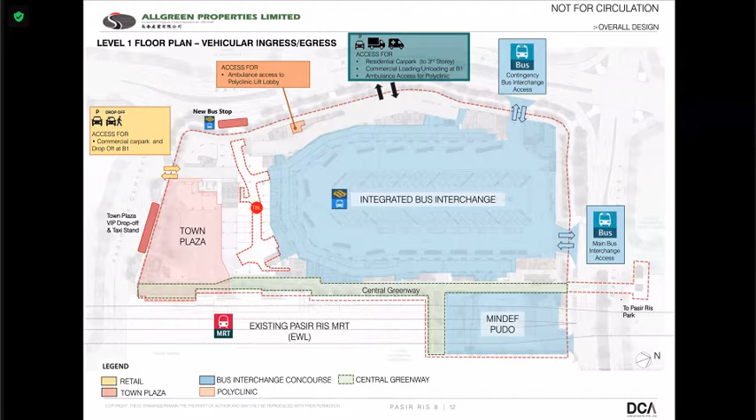In terms of commuters and pedestrians, the entire development is very porous, with many points of entry. Being located in the town center, the development is designed with a covered linkway surrounding all sides, connecting to the town plaza, sheltered, and through the block link as well. There's no shortage of entry points into the development, be it from the MRT, the Cross Island Line, the block link, or the bus interchange itself, which has 6 ingress and egress points by foot.

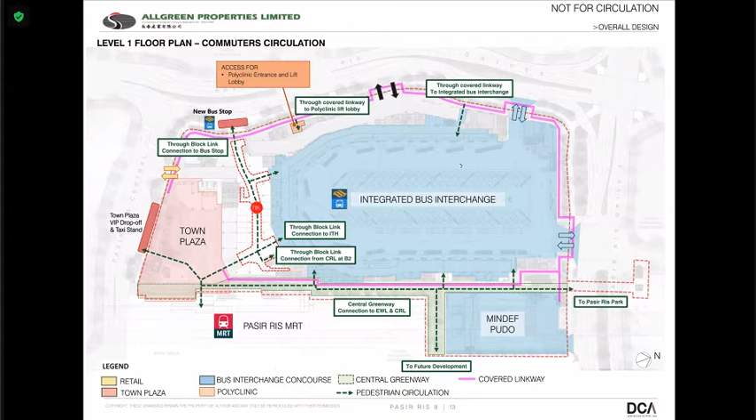For cycling, the development has a walking and cycling path surrounding all 4 sides. To bring cyclists through and into the development, we have no shortage of lifts, sizable enough for the cyclist with his bike to enter.

Likewise, there are 2 sets of lift and staircase provided to reach the residential E-deck and level 3 at these 2 locations.

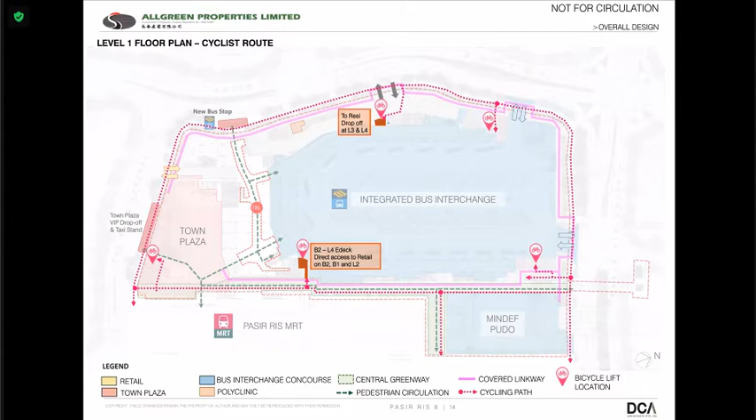The development has about 1,200 bicycle parking lots, located together with end-of-trip facilities at basement 1. This provides convenience for cyclists to bathe, change, go to work, take the MRT, or simply enjoy a cup of coffee at the nearby cafeterias of the development at basement 1.

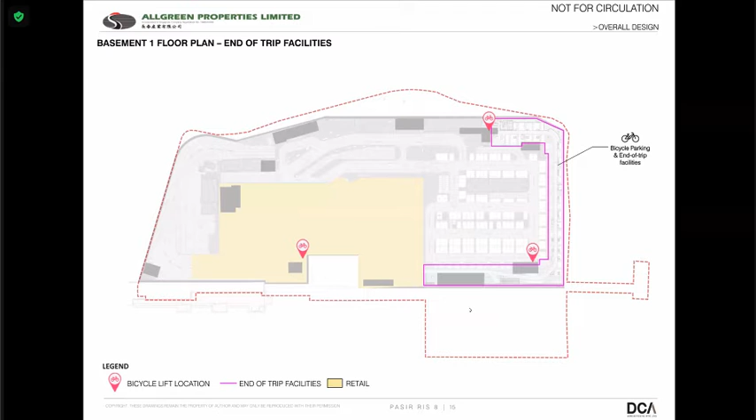For residents surrounding the covered linkway of the development, they can enter and walk sheltered through the covered linkway surrounding the development to go home to their respective blocks.

These are the locations of the respective lift lobbies. As mentioned, there are 2 dedicated locations. The major one, located 50 meters from the MRT exit, is a pair of resi lifts that bring visitors and residents up to level 3 and level 4 E-deck of the residential components. Whereas at Drive 8, near the vehicular entrance for the resi components, we have a resi drop-off lobby that brings residents and visitors up to the arrival lounge at level 3 of the resi development.

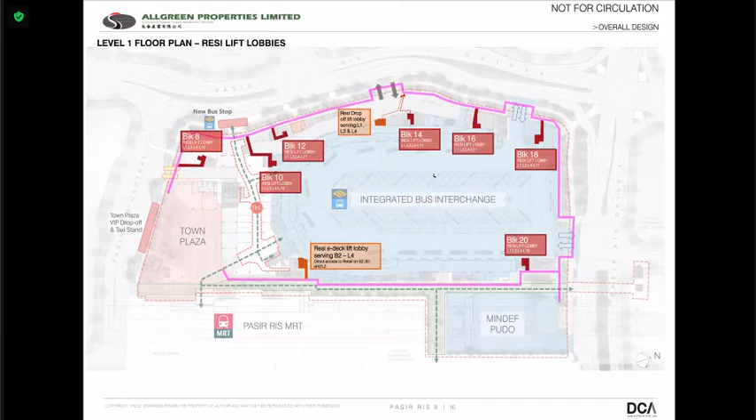This same pair of lifts near the MRT exit also brings residents and visitors up to the elevated central greenway located at level 2, where we have an abundance of alfresco dining for the retail components.

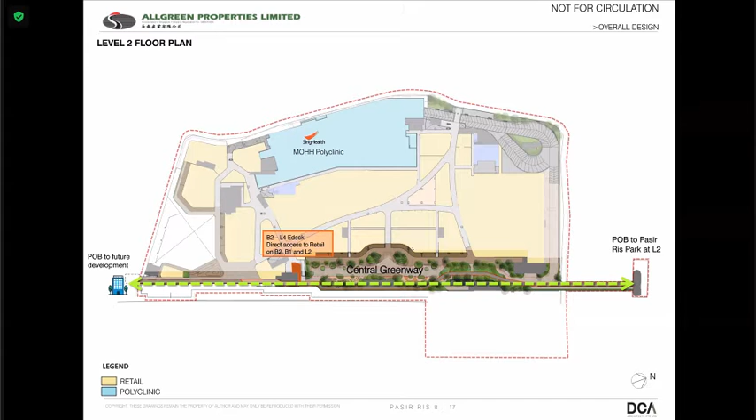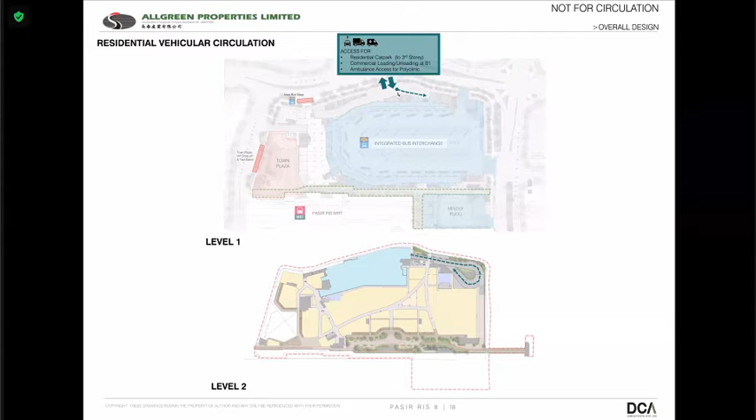This is the vehicular circulation for residents going up to the level 3 car park. They take ingress from Drive 8 through a ramp and wind up to level 3, where we have our resi drop-off with a guard house and a lift. Residents who drive will take ingress from these locations into their car park proper and can enter their home by the block lift lobbies located at level 3.

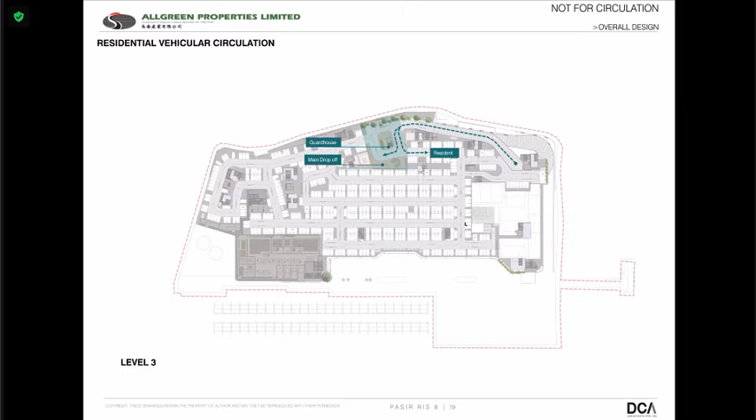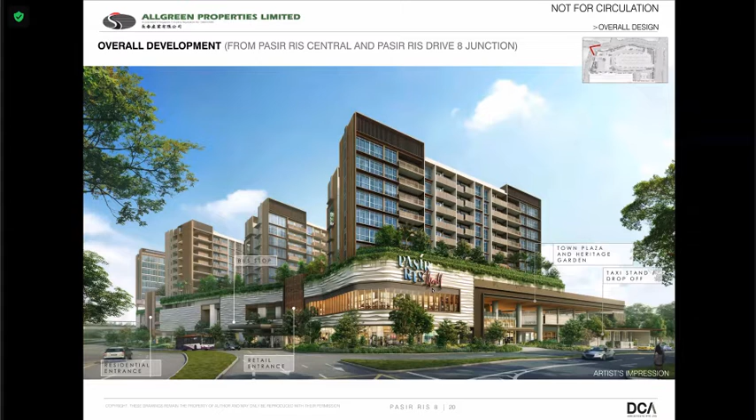This is what we envisage and have created for the terracing green oasis along the Central Greenway. Right next to the MRT viaduct, you have a level 1 Central Greenway where pedestrians and cyclists can walk undisturbed by any vehicles. Level 2 is an elevated greenway with festival dining right next to and underneath level 3, where the car park is, and level 4 is our resi amenities deck overlooking these green lawns.

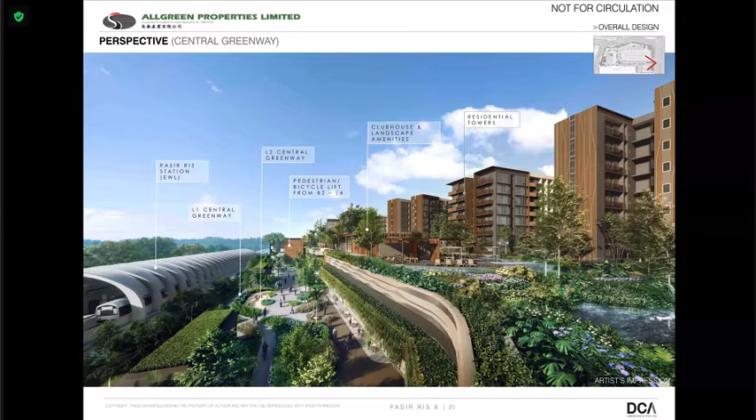This is the Town Plaza event space, not found in any other part of any Town Plaza. We have a double volume and amphitheater seating located at level 1M, with the heritage garden that flanks the entrance to this event space and the entrance to the development.

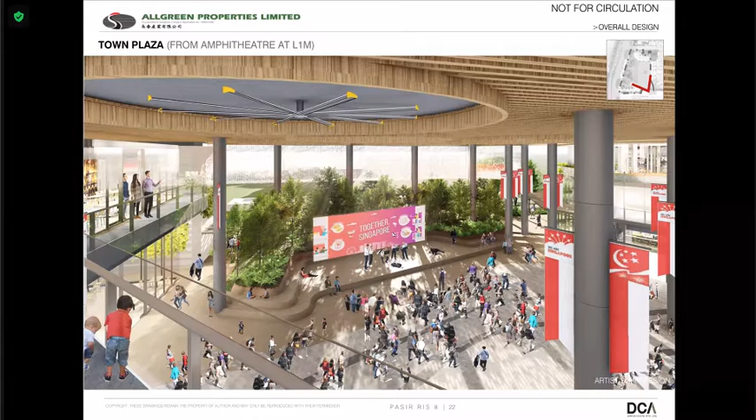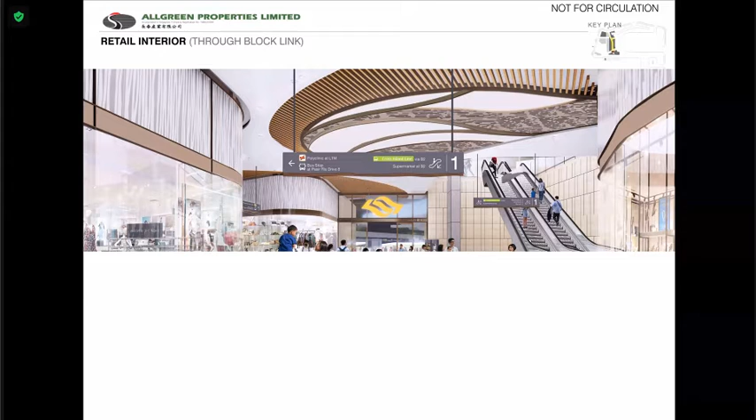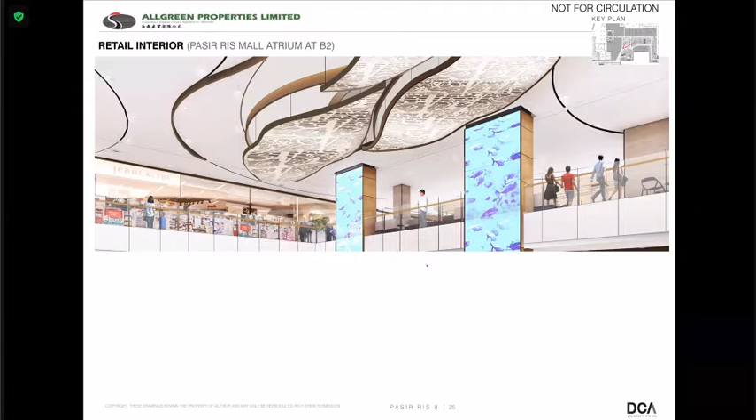This is the entrance from the MRT, the mall entrance. The look of the mall, you can see the access points into the bus interchange. This is the Through Block Link, B2 Atrium Retail Mall.

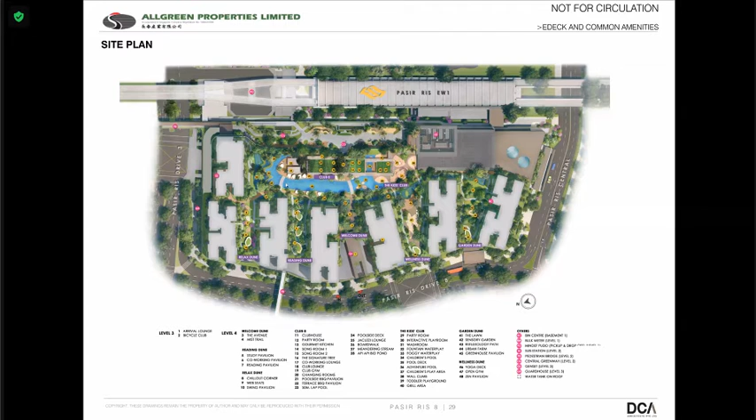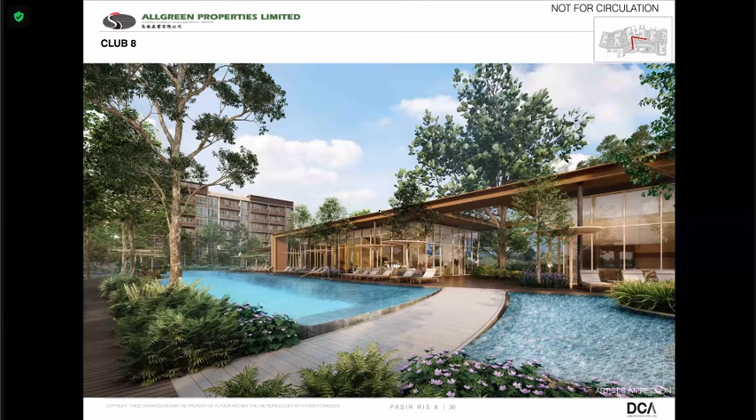As you can see, the Club 8 is actually longer than the 50 meter lap pool we have here. Club 8 is surrounded by lots of water features and swimming pools, and we have 2 barbecue pavilions towards the left side of Club 8, and the club gym facing the main 50 meter lap pool. For function rooms, we have the gourmet kitchen, the party room, and 2 karaoke rooms which we call song room 1 and 2, a signature tree in the center, and the kids club towards the right side of this entire facility deck.

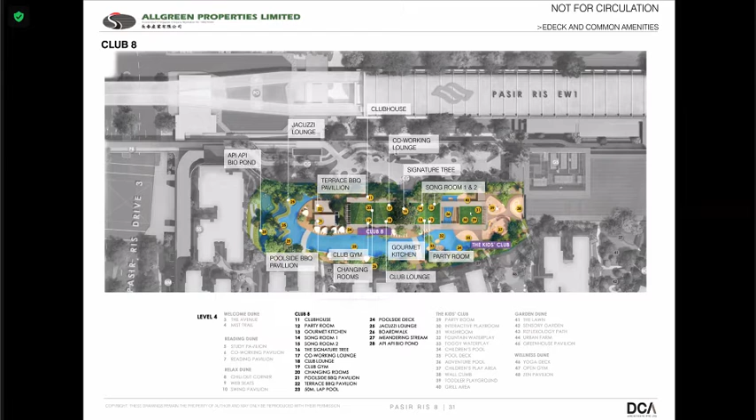This is an artist impression of the co-working space, which we also call the club lounge. As you can see, we have a dedicated concierge space on the far right of the perspective. We also have co-working spaces here with meeting pods and a meeting room behind the concierge, and a little bar pantry space here. The color palette we are using is more of a seaside feel, to create a relaxing, breezy, light and airy internal space.

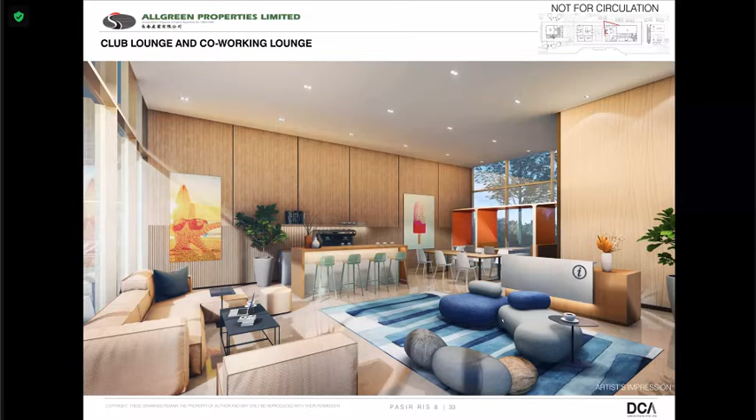Opposite the co-working space, the club lounge, we have the gourmet kitchen here. What we are looking for here is a warm palette, which we have created. Residents can also hire their own personal chef to cook for them, to host people here.

So basically Club 8's facilities design again rides on the coastal and beach as well as the park theme, so it's a cozy environment for residents to have a small party. This gourmet kitchen is able to partition into two rooms for smaller gatherings by the residents and their invited guests.

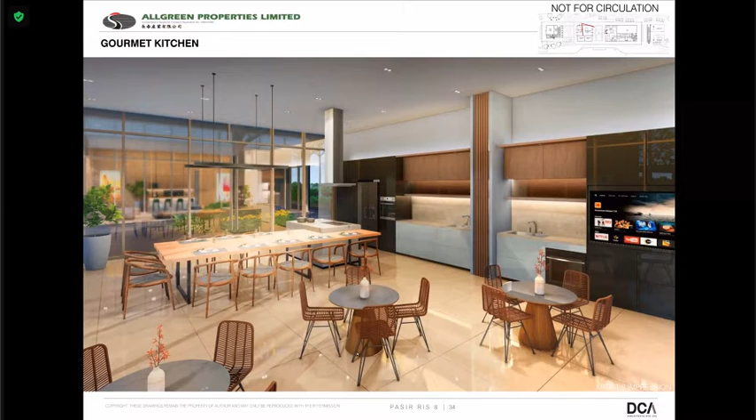Moving on to the right side of Club 8, we have the dedicated kids club. Surrounding it you have the adventure pool, with your own pool deck away from the adults' pool deck. You have your party room, interactive playroom, and children's play area, as well as wall climb and toddler play area. So you can see the design focuses mainly on families with young children.

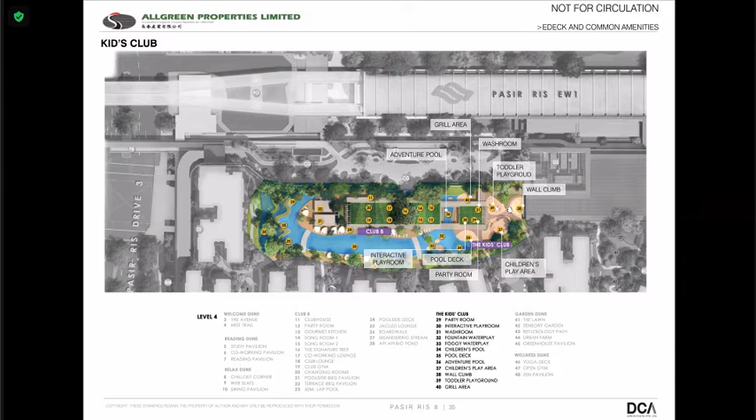This is a perspective from the kids play area. You can see the kids club underneath the roof here.

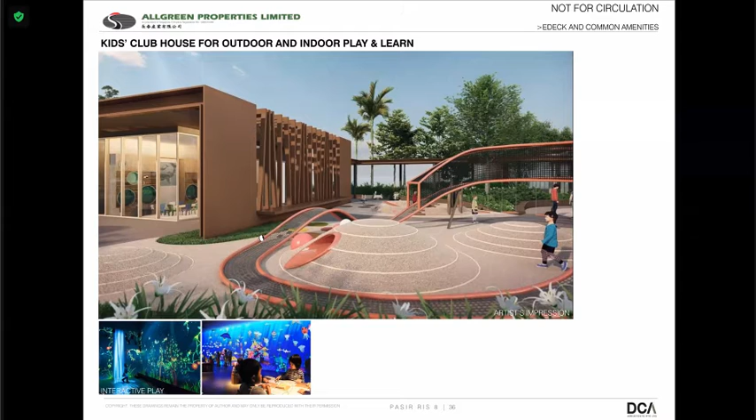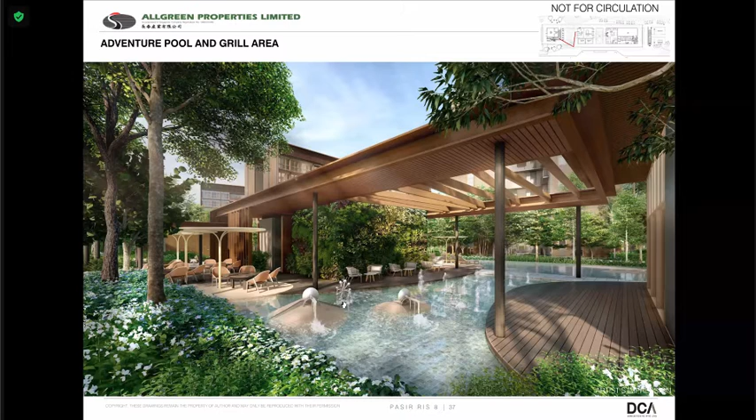This is the back of Club 8, where you have your grill area and adventure pool for the kids. Another view of the kids play area, where you can see in the middle of the perspective a wall climb area, and also the toddler play area here, and the canopy which leads to the lift lobby of the east-west line, next to the east-west line.

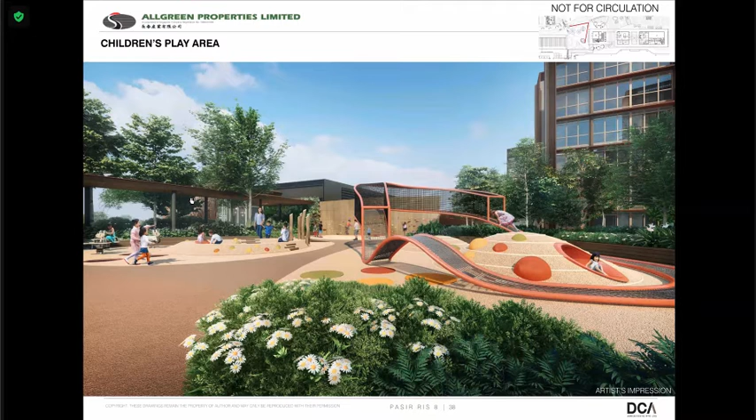This is our 1 bedroom flexi unit layout, AF1, which is one of the 3 show units we have in our sales gallery. So it's at 48 square meters.

What differentiates this from most of the typical 1 bedrooms is you have this collapsible sliding door in the middle, where our aim is to open up the space so that a 1 bedroom doesn't feel too small. When people come, you can host them and open up the space so that you have the full length of view outwards. Also the master bedroom, you don't have to do up a double TV console, because once you open up, you can enjoy your TV here from your master bedroom.

Another interesting aspect of this layout is that we have this hotel suite kind of feel where you have this sliding door. As you can see at the master bath, it doubles up as a wardrobe door and a master bath door. So when you close the master bath door, you can see the wardrobe space - it's an open shelves kind of wardrobe space.

The developer will be providing this dresser table here. As you can see, the master bedroom is actually quite large. For the dining area, you have this pull-out table, so as to maximize the kitchen area here.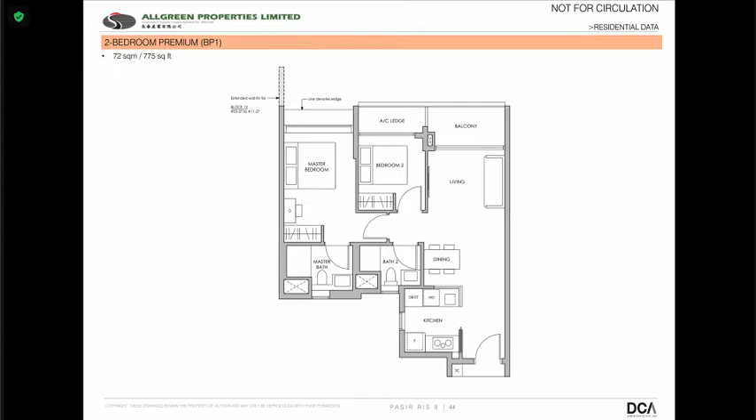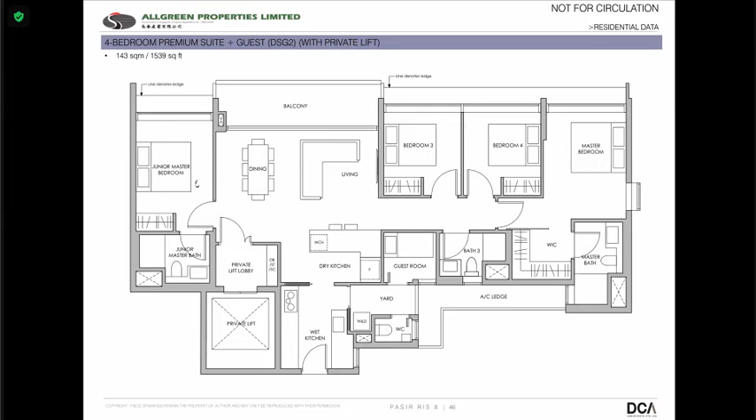Lastly, we have our 4-bedroom premium suite. This 4-bedroom, you have your very own private lift. You see the private lift lobby at the bottom of the layout, leading towards your full-length dining living area as well.

You have your junior master bedroom on the left side, so you have this extra bedroom here with your junior master bath. Then you have your dry kitchen in the middle of the unit, leading to your wet kitchen, which then leads out to the main corridor of the block.

Similarly, you have a very nice big walkable size yard, which leads to the guest room. And similar to the 3-bedroom, you have your walk-in closet, but this walk-in closet is larger than the 3-bedroom.

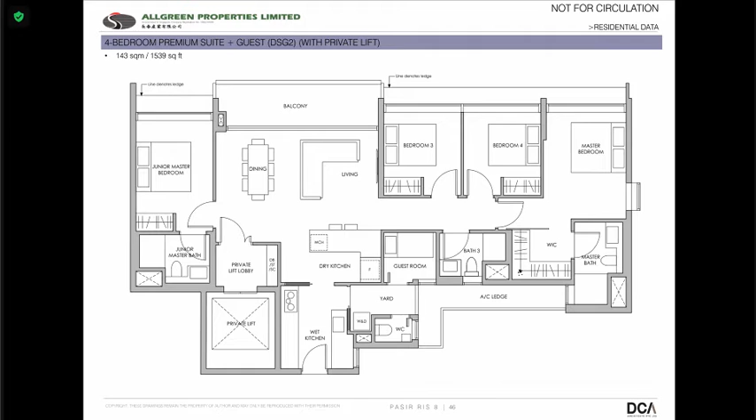I'll pass the time to my colleague Insia to brief you all about the appliances. Okay, hi everyone, I'm Insia.

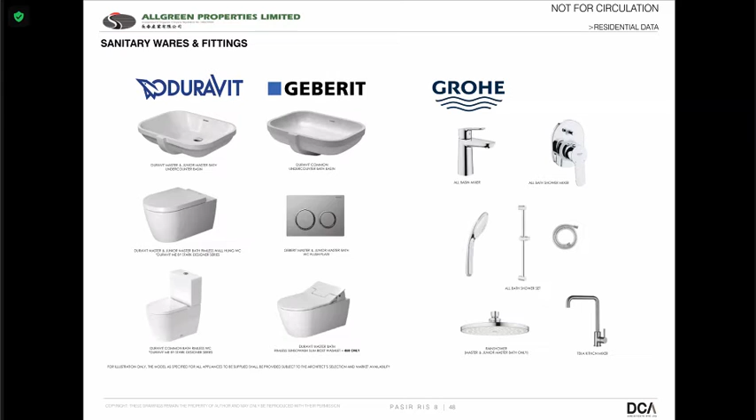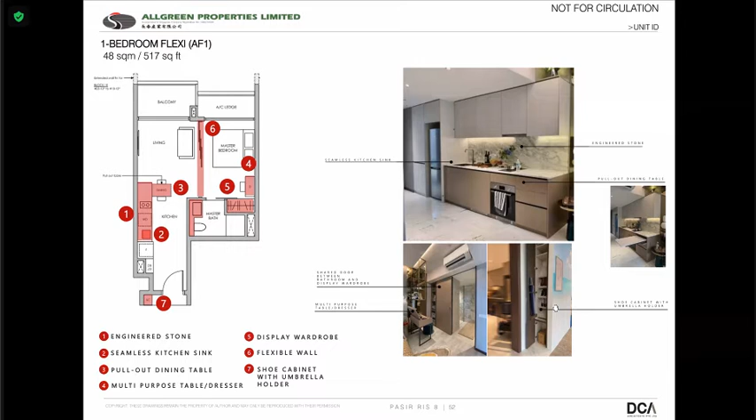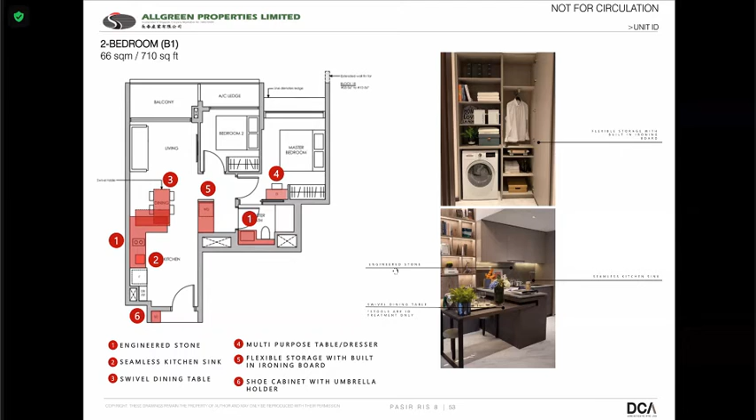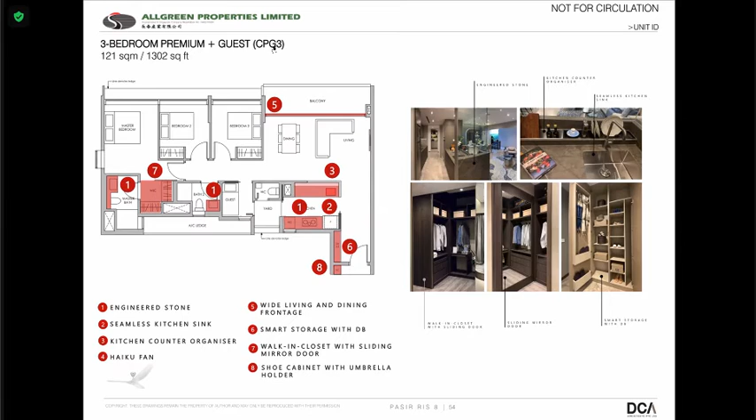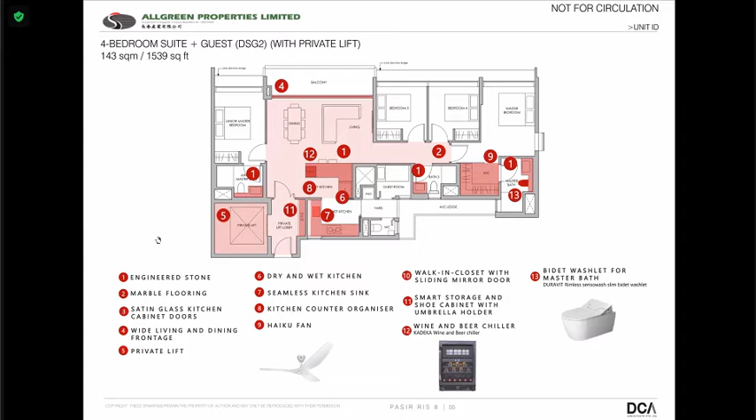Okay, so this is the cabinetry provision. For all units, we're providing the shoe cabinet with the umbrella holder. For the 1 and 2 bedroom, to facilitate flexible use of space, we have the pull-out dining or the swivel dining table, and the flexible storage with the built-in ironing board. For the larger units, 3-bedroom and 4-bedroom, there will be a walk-in closet with sliding mirror door, and exclusive to the 4-bedroom will be the satin glass kitchen cabinet door panel.

For the appliances provision, 1 and 2 bedroom will have the induction hob, and then 2-bedroom premium onwards will be the gas hob. From 4-bedroom onwards, we'll have separate washer dryer, wine and beer chiller, as well as the bidet washlet. The 3-bedroom and 4-bedroom will have the ceiling fan.

For lift lobby security and lift access, as Shufang has previously mentioned, it is highly secure in terms of the resi lobbies, and also very convenient for you to gain access to different components in the development, such as the retail, the integrated bus interchange, as well as the car parks. Although the development is located in the mixed use and podium level, there's a lot of connectivity. However, the resi premises themselves are secure with card access for security. Only certain areas are for residents only. Homes, convenience, yet secure - that's what we have at Pasir Ris 8.

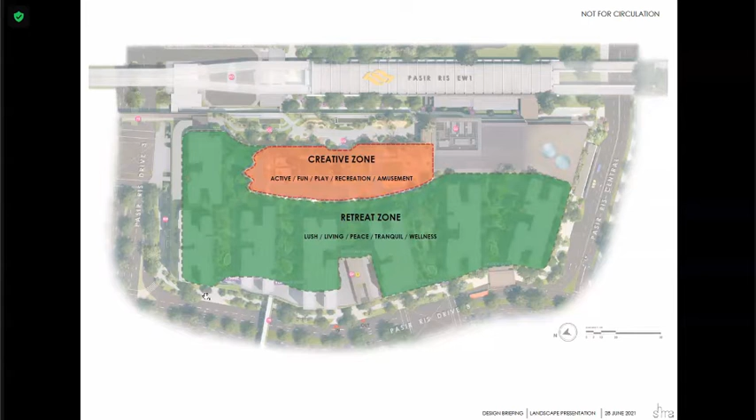Another thing is we also focus on multi-generation activities, from the toddler to the elderlies, being together in this co-living space. So by the layout, we separated into two zones, which is the creative zone, which DCA has already introduced, and then another one is the retreat zone, where we emphasize the functions between each building block to create unique activities and design for each courtyard. So this is the overall layout. The creative zone has two main areas, which are the kids club, and then the clubhouse surrounded with the pools. And then we have the courtyard between the building blocks, separated into 5 zones. We will get into the detail later.

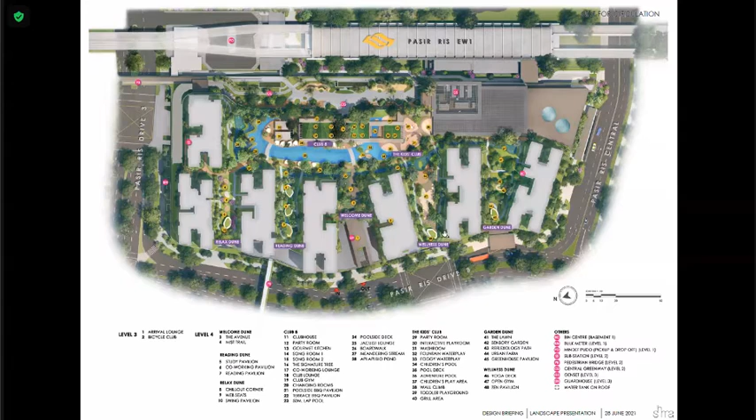So let's start with the creative zone. We want to recap the overall functions where DCA has already proposed. This creative zone contains 2 main areas, which on the right side will be the kids club. We surround the functions for the kids around the kids club, which is the outdoor play space on the right side. We have the net structure play, we have the wall climbing, we have the toddler area with some acoustic play and sensory plays. And then we will have this water body, which is the adventure pool for the kids to play and learn together with the water features.

Around the clubhouse and the barbecue deck, we have various types of pools. We have a 50 meters long lap pool, and then another 20 meters long social pool with some jacuzzi lounge. For the barbecue terrace, we also provide outdoor seating barbecue areas for the users, not only inside the pavilions.

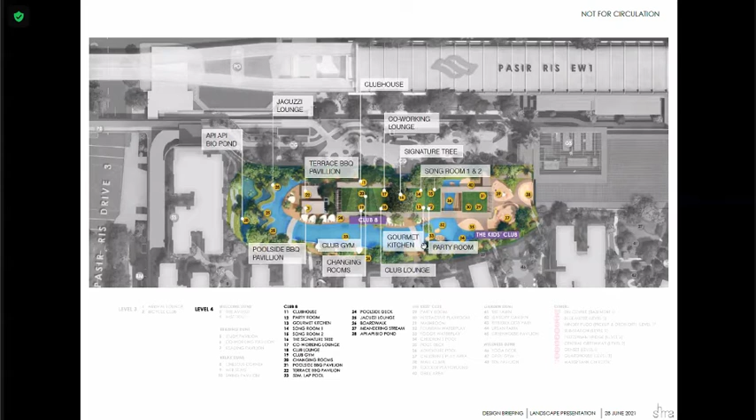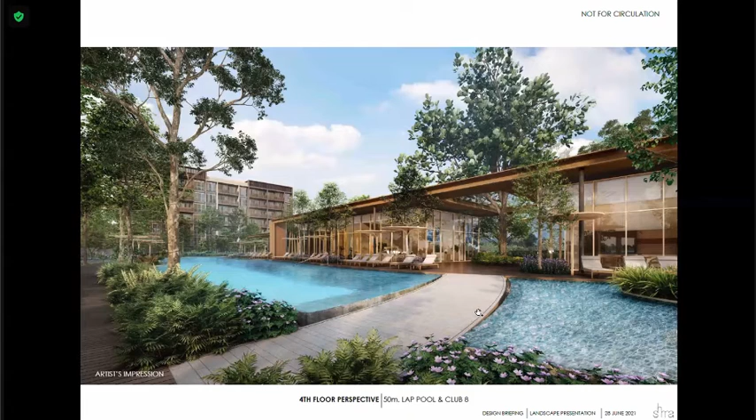So first we will go to the first zone, which is the clubhouse and the swimming pool. The pool here is designed together with the clubhouse to be seamlessly connected, and we are applying the archipelago concept to the site. This is the view from the arrival to the club with the surrounding pool. And then we are proposing this signature tree that can represent the native characteristic of the Pasir Ris.

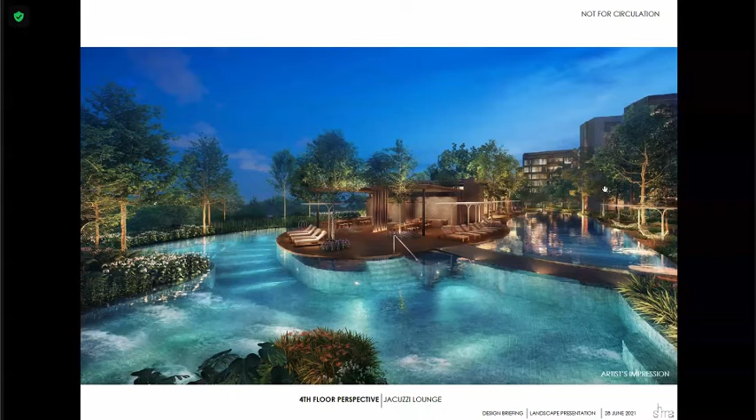So the pool that surrounds the Club 8 contains various types of pools to serve multi-generation users with different lifestyles. On the right side is the lap pool, 50 meters long with 4 lanes. In front is the social pool with more passive activities with 3 big jacuzzi pots.

So this is the overall view for the creative zone. The clubhouse and all the activities are also surrounded by large green landscape and native plantings for sustainable design.

And then in zone 2, we are going to the kids club. We are trying to create a unique play space for the kids, focusing on kids of all ages and emphasizing sensory plays within the large landscape here.

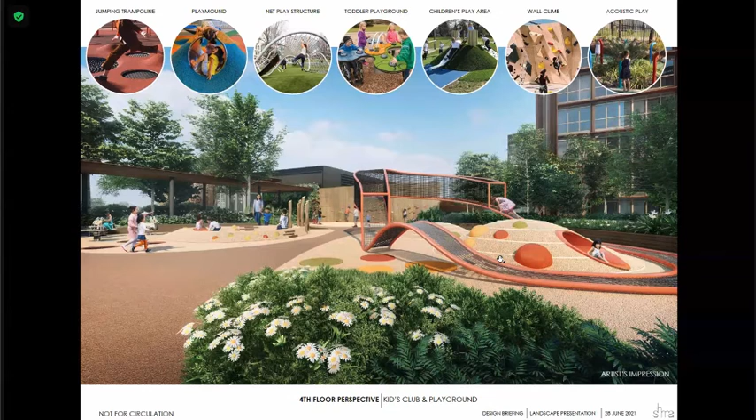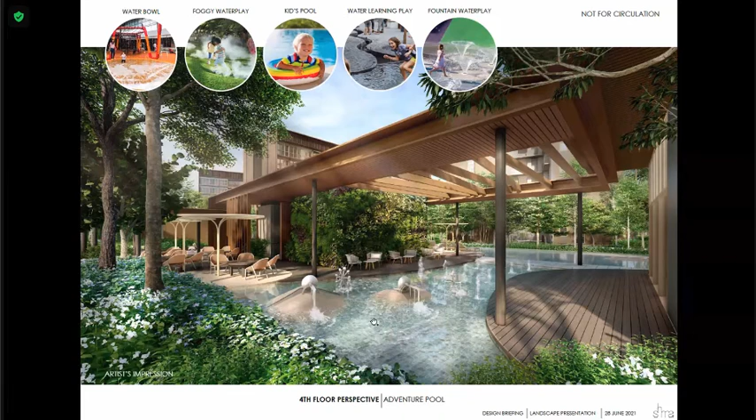As mentioned earlier, we have many types of play including sensory development for kids along with their body and muscles. Another area has plays that go along with water features - we have some water bowls, the foggy waterplay, some kids pool, and parts of the play where you can learn together with fun activities.

And then we are moving on to the retreat zone. As I mentioned earlier, the retreat zone is divided into 5 areas between the blocks, creating unique activities for each one to be different.

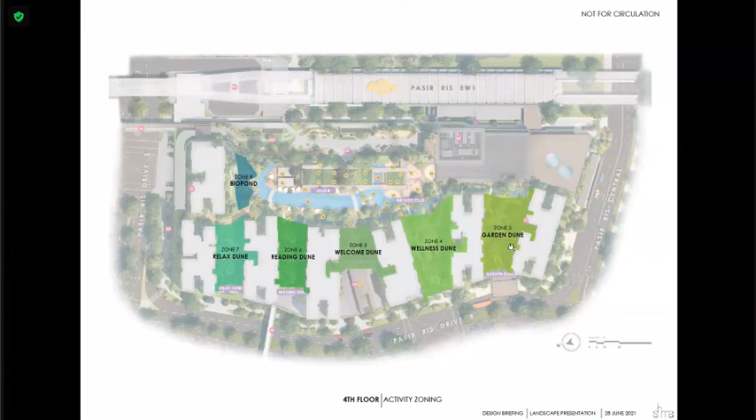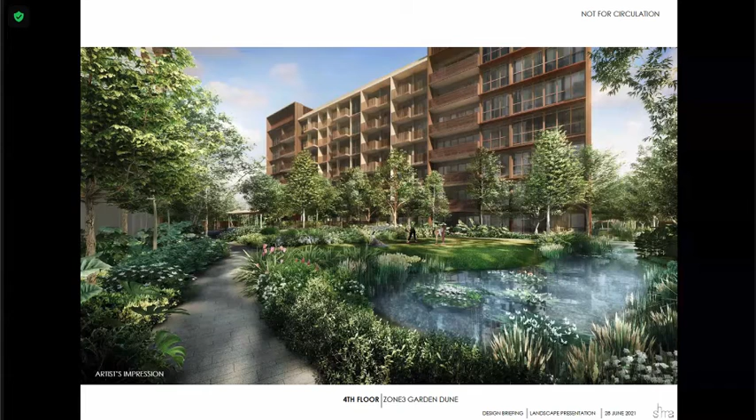So we are starting with the right one, the garden dune. The garden dune is the very passive type of recreation activity. We are proposing a therapeutic garden, a yoga lawn, and an herbs garden - all to enhance the 5 senses: sight, hearing, taste, smell, and touch, and to promote holistic health. Overall it will look largely like a garden feel with pocket spaces for activities like pavilions, therapeutic garden, herbs garden, and the yoga lawn located near the main water features.

And the second courtyard is the wellness dune, an outdoor fitness and exercising node serving all age groups including disabled users. This deck contains all types of outdoor exercise such as weight training, stretching, and we also propose a multifunctional deck. We also push the open space near the water feature, so you can enjoy the sounds and feel of nature along with your activities in daily life.

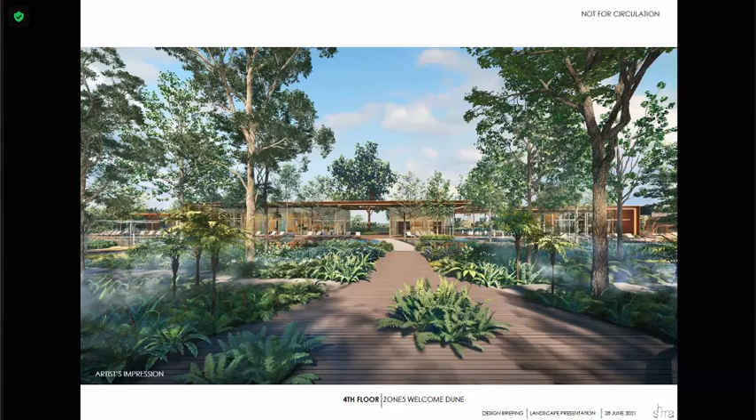And the middle courtyard, where it connects to the drop-off from level 3 entrance, we are proposing the welcome dune. This welcome dune acts as the arrival plaza and also the visual linkage toward the Club 8, as you can see from this image. You will see the clubhouse and have this signature tree to welcome you home every day. We also intended to create the experience of walking through the forest for users' daily life before they enter or exit the project.

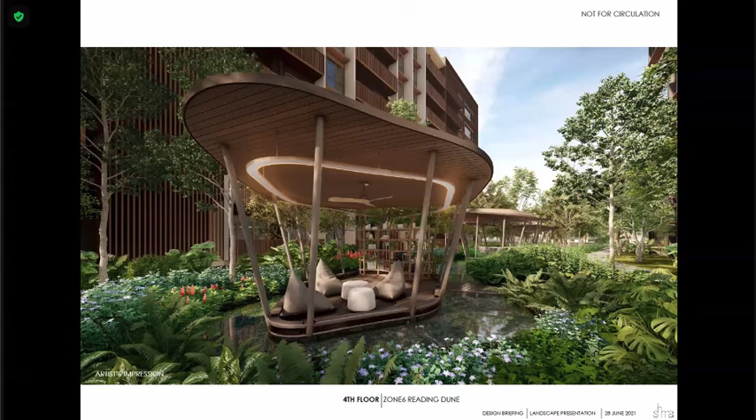The fourth courtyard is the reading dune, where we're trying to connect people's activities with nature more than the other ones. We are proposing outdoor co-working spaces divided into various types of pavilions inside this courtyard, giving more shading and relaxing space. The function is different in each pavilion - working spaces, reading space, and study spaces for users. This area is also surrounded by large plants, and a special character of this courtyard is a small creek to refresh the atmosphere with the sound and smell of nature.

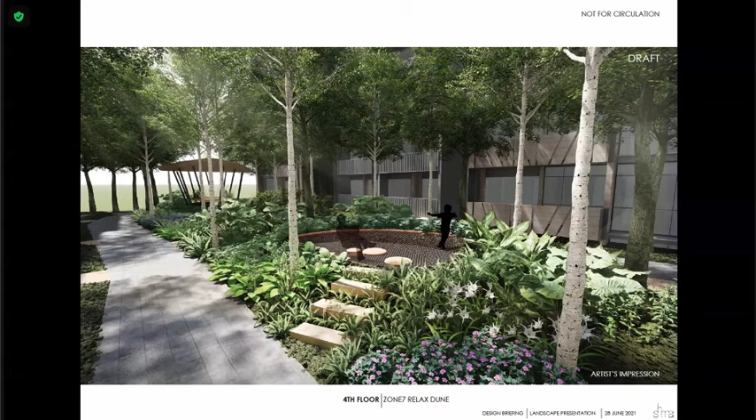And the fifth courtyard is the relax dune on the far left. It provides hideaway, relaxing spaces among the forest, and we also designed accessibility with some pocket spaces for the disabled. This courtyard will look more laid down with seating spaces, more relaxing compared to the other areas.

And also from another main water feature of the development, next to the clubhouse pool, we are proposing the bio pond, which acts as a main part of our water management system, following the ABC and WSUD guidelines to purify, reuse, and recirculate water within the project. So we also use this main water management system as relaxing spaces.

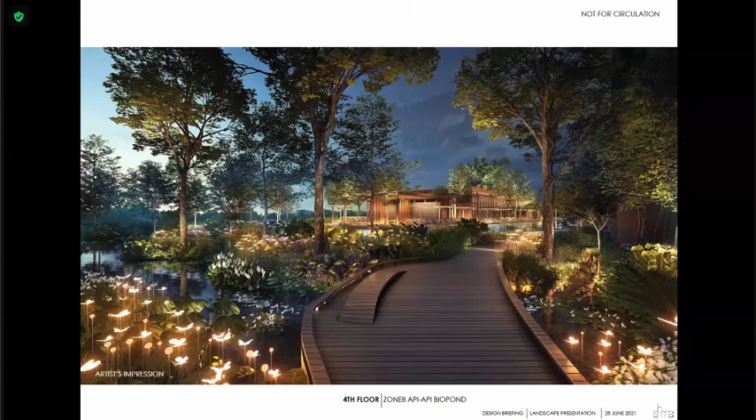So what we are proposing is mimicking this very special characteristic of the estuarine landscape, the api-api pond, or fireflies pond - the special character of the mangrove forest. We bring the soul of the site into the development, so at night the fireflies will be lit up, becoming another attraction of the project.

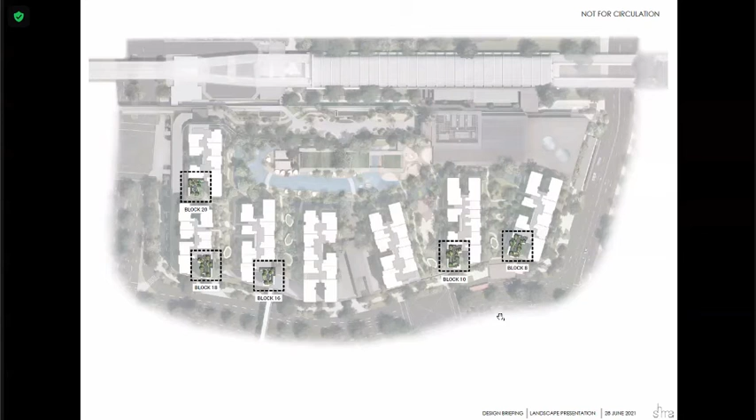And lastly is the sky terrace on the 8th floor of the 5 buildings, where we are also proposing small pocket courtyards for the residents, located on these 5 blocks on level 8. The pocket space introduces outdoor seating and overlooking spaces, surrounded by lush plantations, same as level 4.

Okay, I think that's all for the landscape part.